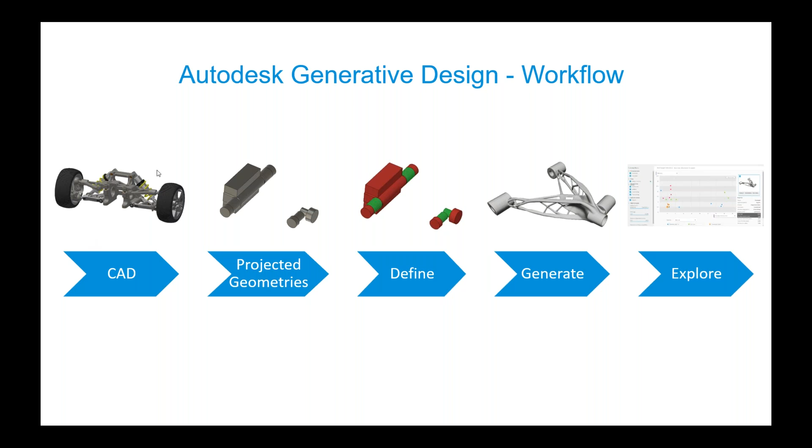So again, just a super high level generative design workflow. And again, I'll point you to some other classes which will go in much deeper. I'm going to take a moment to talk about some of the different manufacturing methods.

Again, another strength of Autodesk Fusion 360 Generative Design are the variety of manufacturing methods that we have. There's additive manufacturing, there's die cast, 3 and 5 axis milling, 2.5 axis milling, and 2 axis cutting.

So a lot of the times, it comes up in our Q&A session that people say that some of the outcomes look very elaborate, like you just saw it with that control arm. And that's true, right? Because it's flashy. It makes people take a second look and they say, how did we generate this outcome?

I would say that you have a variety of manufacturing methods available to you. If you do something more like a 2-axis cutting and even some of the die cast output, you would see something maybe more traditional looking, and people might not even know that you utilize generative design to create that. So it is possible too, if you are on the fence at the moment and say some of these outcomes look just maybe a little bit wild for what we're ready to do right now. But certainly, yes, explore all the different manufacturing methods available to you.

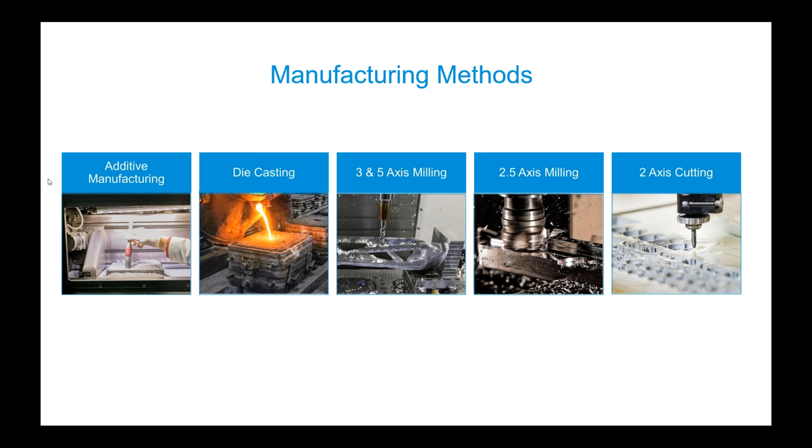All right, so the next thing we're going to do is a year in review. I wanted to take a couple of minutes to talk about some of the things that have come out in generative design within the last year. Again, when Apollo and I do our typical presentation, we're focused on helping people understand what generative design is.

And we're focused on a pretty straightforward start to finish process or workflow. So that way people can watch that presentation and say, okay, this is how I get started with design, but we're not necessarily always informing you about what some of the latest developments are. And so we're going to take a moment to look at a couple of them here.

If you want to go down to the next slide here. So I just picked out a few of them. There were certainly more, and we'll mention that or talk more about that in just a moment. But to highlight just a couple of them, starting in May, there was a material definition per manufacturing process.

And the reason that this was implemented was because sometimes you might choose a material but it is specific to the manufacturing process, right? You might have a material or a couple materials that you want for an additive process, but it doesn't necessarily make sense for either the milling process or maybe a cast process. So then you can define a different material for those different processes and get the outcomes for those different manufacturing methods, but also specific to those materials. So that really was a nice enhancement that came out back in May.

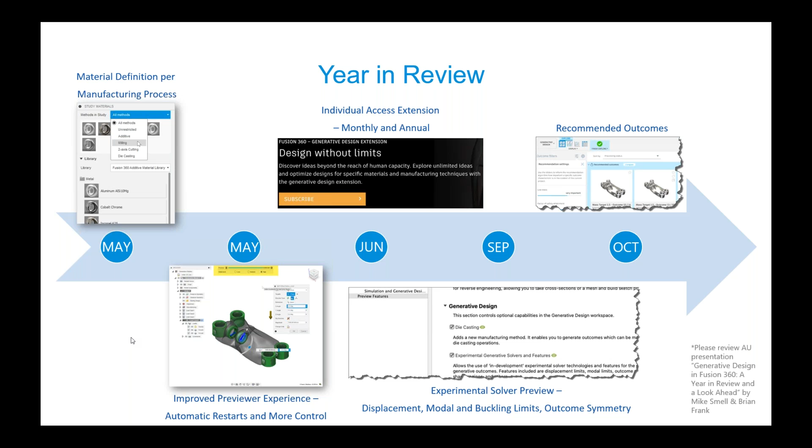So if having that certification is something that is important to you and you really are going to get into generative design and say, this is part of my professional career, now you have expert level certification. Myself and some of the other panelists here today were involved in that certification, reviewing some of those questions and saying, look, some of these are too easy. It's just a simple memory exercise. And then other times on the flip side of that, sometimes maybe they're a little bit too difficult. The wording was maybe just a little bit too tricky, or the image maybe didn't show what was trying to be conveyed in the question. So we also participated in reviewing those questions.

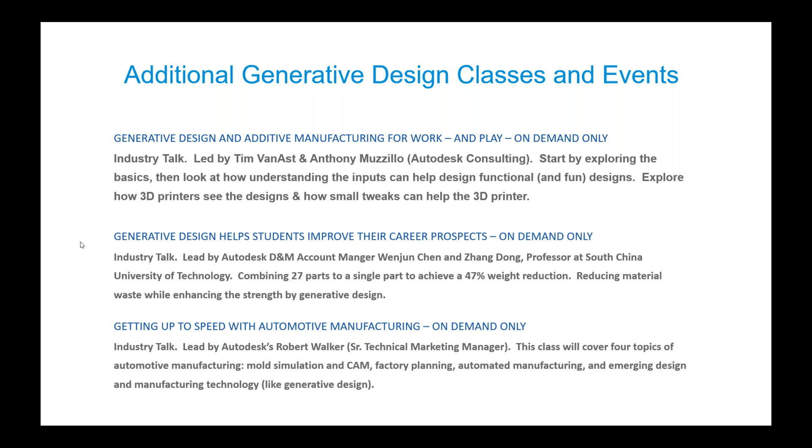Okay. So the next thing we're going to do is a look ahead to what's coming in the future with Autodesk Fusion 360 Generative Design. So at this point, I'm going to welcome Mike and/or Brian. You guys can tell us about what we might expect from the software in the future here.

Cool, thanks for that, Mike. So as Mike said, my name is Mike Smell, Senior Product Manager on Fusion 360 Generative Design. Brian's joining me here as well. We're teammates and we kind of split our time in the way that we work on the different things inside of the generative design experience. Myself focused more on the user experience and how we get the models through the entire Fusion pipeline and downstream. And Brian does a lot of work setting up the back end for success.

So working with our solver teams, working with all the engineers that Mike had picked out some classes on where they're really giving you kind of a behind the scenes look. So we'll talk through the next couple slides here in that context. So I will start with the first project that we're working on.

And this is a longer range project that's broken up into a couple phases, and you'll see these things happen, some in the very near term and some in a little bit longer term, but it's really around being able to work in the assembly context that you're familiar with. I'm sure for those of you who have looked at generative design so far, you have a basic understanding that we're applying the loads and constraints directly to the part that we're doing the design exploration on.

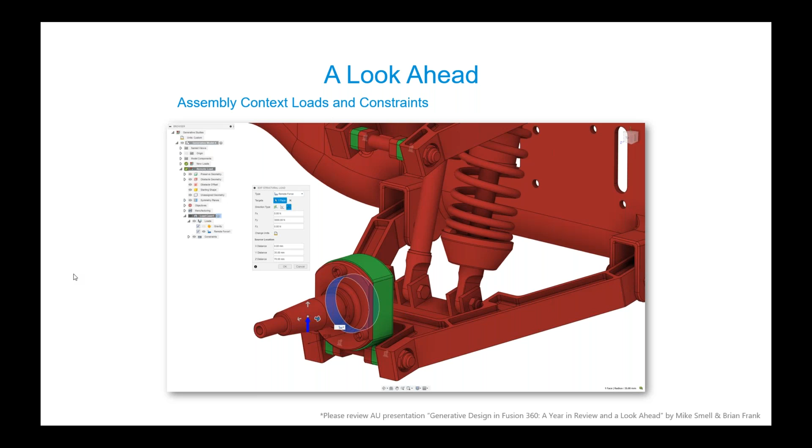Mike, if you want to go on to the next one.

The other area that we have a big focus on, as Mike talked about, is around manufacturing. And one of the projects that Brian and I have been tag teaming over the past couple months with our development teams is around additive manufacturing. So we've had an additive manufacturing constraint in the product since its inception. It was our first step into creating designs automatically for additive manufacturing. And what we heard from a number of our users is that, in a lot of scenarios, it just didn't give solutions that met their expectations.

And part of the reason for that was it was trying a little bit too hard to make fully self-supporting designs, sometimes at the expense of creating shapes that were not really usable at all. So Brian and I went back to the drawing board with the feedback that we had got from a number of our users and talked to our engineering teams about how can we improve the shape quality, how can we improve the way that we address overhang angles, how can we improve the way that we handle minimum feature size, because those are the things that we were hearing were not quite meeting user expectations.

And one of the things that we arrived at is that, one, we could improve our algorithms on all of those areas, but also, we relaxed our requirement a little bit about always trying to create a fully self-supporting design, to a detriment. We've made some really good progress and are hoping to bring this to market pretty soon.

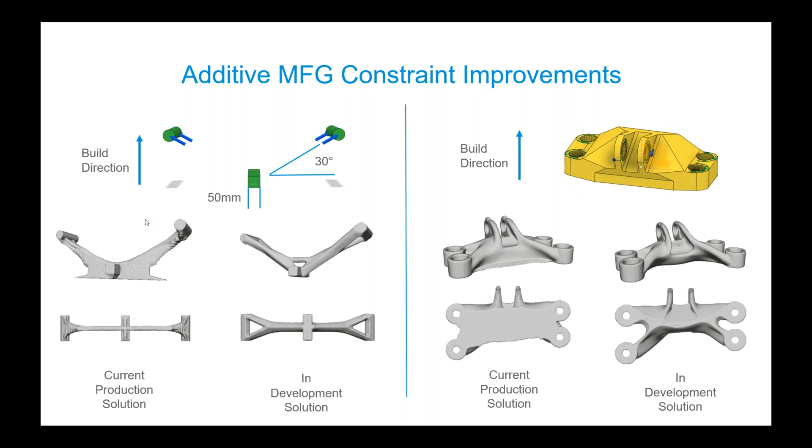And then I'm going to turn this one over to Brian. He's been knee deep in this project for quite a while now. So Brian, take it away.

Yeah, thanks, Mike. So one of the things that we've heard from a lot of you is, being able to use generative design for structural applications is great, but what about other physics? And so one of the things that we've been working on for quite a while, and we're getting closer to giving you access to try, is generative fluids. The way we define this is having the system help you determine the most efficient flow path given a number of criteria.

So we're focusing right now on optimizing for pressure drop, so minimizing the amount of pressure drop that happens when you take fluid from one location to another. We're really excited about this one. We think there's going to be a lot of applications for this. There's a lot of fluid transport that goes on in flow control and all of your projects, and we're really excited about having a generative design system help you design these flow paths.

And the interesting thing is we're building on top of all the existing goodness that we have in generative design. So you'll be able to get this flow path as an editable BREP. You'll be able to use this flow path in downstream operations, whether you want to use it as a cutting tool in another solid, or as an obstacle in a structural design, so that you could figure out how to encapsulate the flow, and whether that flow device or flow path is actually doing some structural work as well.

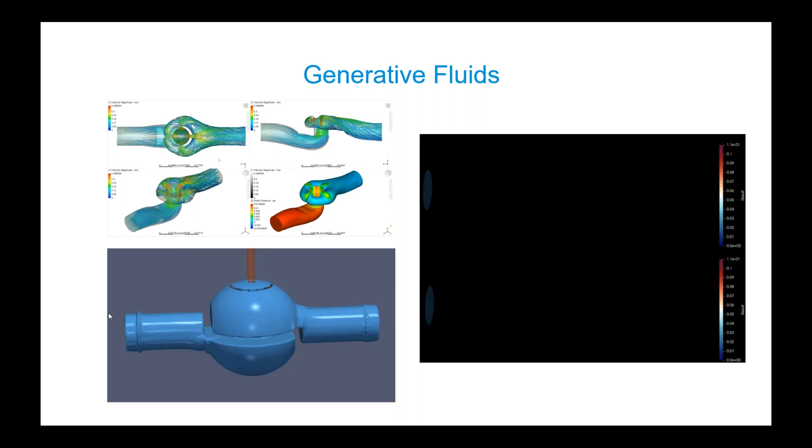We think there's going to be a lot of opportunity where you can start to combine fluids and structural. Ultimately, we're trying to get to that multi-physics solution. So we're really excited about this. If anybody on the call has an interest in this, I'd encourage you to reach out to us. There's contact information available, and if not, we can give it at the end, or throw a question in the chat. But we really think this is going to be high value technology for all of you that have to move fluid from one place to another.